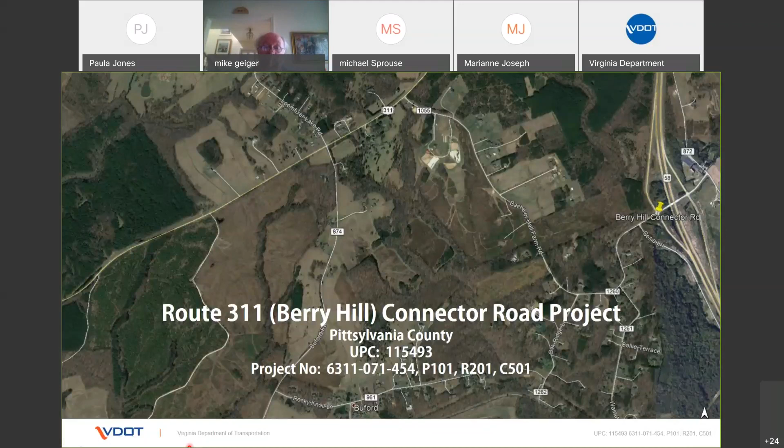Given the unique circumstances of the COVID-19 outbreak, along with our commitment to protecting public health during this national emergency, VDOT is conducting this virtual design public hearing to avoid in-person contact. This presentation will cover the same information that Lynchburg District staff would have shared during the in-person meeting. However, the comment process will be different. Details on how to submit your comments and have your questions answered will be covered later in this presentation. All project information can be found on VDOT's website, www.virginiadot.org.

The virtual design public hearing has been convened by the Virginia Department of Transportation and is being held to receive and consider comments for the Route 311 Berry Hill Connector Road project. You may have attended previous public hearings conducted by VDOT. However, for the benefit of those who have never attended one, I would like to explain why and how VDOT conducts a public hearing. A public hearing has 4 essential purposes.

First, to inform the public of the planning of the project and to present recommendations based on the design to date. Second, to describe the project so that those attending can determine if the project will affect their lives and property. Thirdly, to provide the public an opportunity to see information and express their views at this stage in the planning process when flexibility to respond to comments still exists before design decisions are finalized.

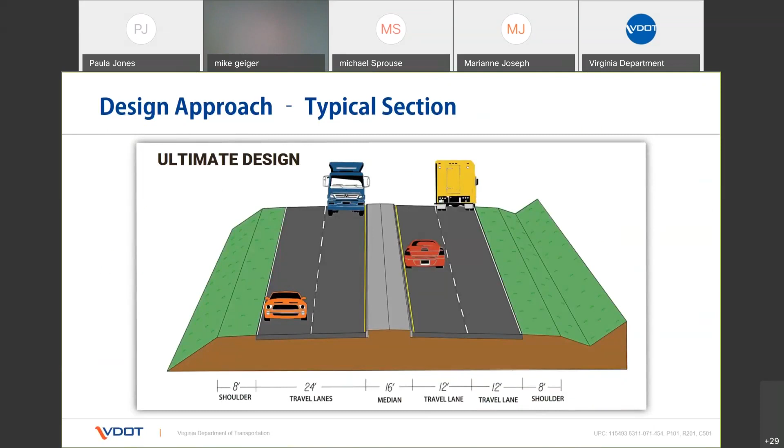The current connector road typical section will build two 12-foot lanes with 8-foot wide shoulders, one in each direction, that will later serve as the eastbound lanes in the future, and will grade for the westbound lanes. This allows for the installation of infrastructure that can be modified in the future that will mitigate future environmental impacts to existing streams and wetlands and surrounding properties.

There are 4 secondary roadways that will be redeveloped to provide a cohesive connection to the new connector road's horizontal and vertical alignment. The typical section for Route 874 Buford Road, Route 1260 Oak Ridge Farm Road, Collie Lane, and Route 1055 Bachelor Hall Farm Road will consist of two 11-foot lanes with 5-foot wide shoulders.

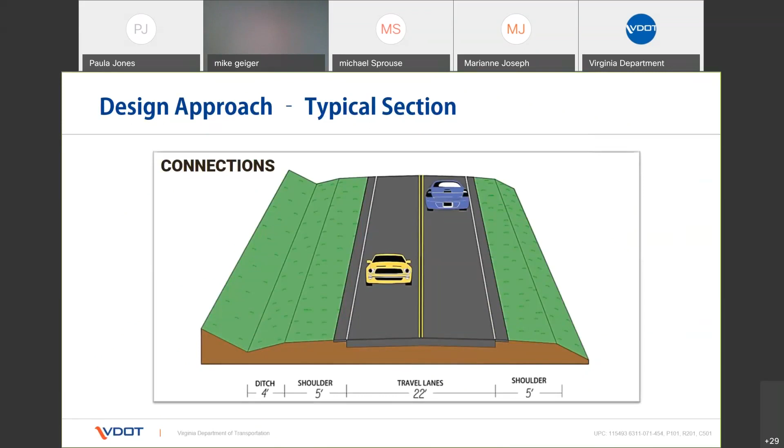The next few slides will represent the plan view of the corridor. After reviewing each plan view, I will zoom in to allow for a closer look. As we review the project, I will highlight significant aspects of the design.

Beginning at the intersection of Route 311, the connector road will tie into the existing two-lane section, and as we travel eastward, the pavement width will begin to widen to accommodate the new Route 311 connection to the connector road. At this intersection, the design will incorporate a right turn lane in the westbound direction to allow for free flow movement onto existing Route 311.

The through movement from Berry Hill will continue to the 58 bypass rather than intersecting with Route 58. Additionally, approximately 1,150 feet of existing Route 311 Berry Hill Road will be abandoned and obliterated.

Continuing eastward towards Route 874 Buford Road, the horizontal and vertical alignment along Buford Road has been designed to improve the overall function of the roadway and to provide sight distance at the new intersection of the proposed connector road.

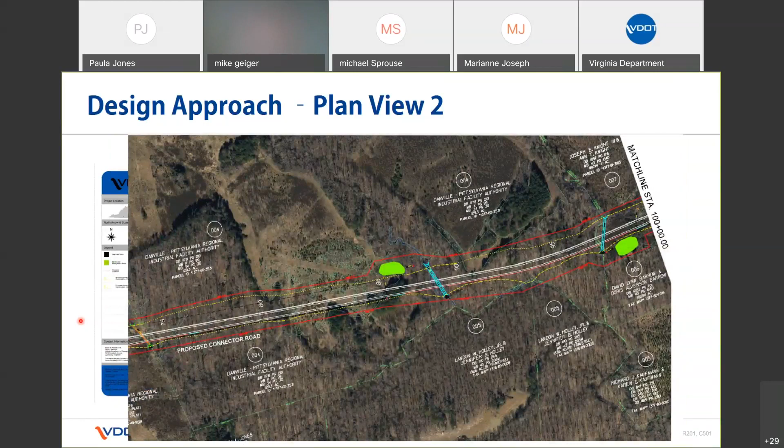Continuing along the corridor, we have the extension of Route 1260 Oak Ridge Farm Road to provide the new ingress and egress to the connector road while closing the existing connection to address the spacing concerns and the close proximity to the existing ramps. A cul-de-sac will be provided to allow residents, school buses, and emergency vehicles an opportunity to successfully turn around within the subdivision.

During the location public hearing held on June 6, 2019 at Brosville Elementary, we received several comments from the residents along Route 1055 Bachelor Hall Farm Road to not connect Bachelor Hall Farm Road to the new connector road. Presently, the main ingress and egress to Bachelor Hall Farm Road is off of existing Route 311.

Therefore, a cul-de-sac has been incorporated at the end of Route 1055 to allow residents, school buses, and emergency vehicles an opportunity to successfully maneuver within the subdivision. As we make the Route 58 connection, as previously stated, the existing Oak Ridge Farm Road access will be obliterated and a cul-de-sac installed. Collie Lane shall tie into the connector road to serve those residents.

Throughout this section of corridor, there are significant fill slopes that will require guardrail. These plans also reflect the proposed right-of-way and utility easements necessary to develop the connector road. During the construction phase, access to private and commercial entrances shall be maintained at all times during the life of the project.

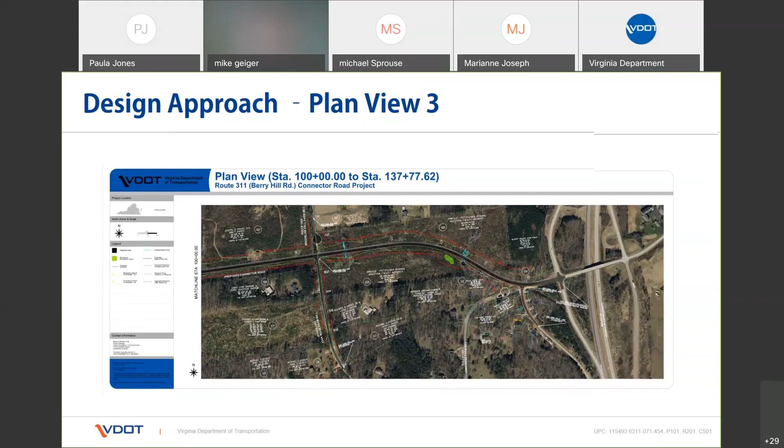Technical documentation for this project addresses the potential environmental impacts identified in the preliminary engineering process. These areas of consideration include archaeological resources, historic resources, wetlands, waters of the U.S., biological resources, hazardous material, and the State Environmental Review Process, also known as SERP. In addition to the other items listed above, the State Environmental Review Process has been completed for the project. The following slides will include a brief summary of the findings.

The William & Mary Center for Archaeological Research conducted an archaeological survey of the environmental project corridor associated with the proposed construction of Berry Hill Connector Road in Pittsylvania County. The investigation was intended to provide specific information concerning the nature and distribution of archaeological resources within the proposed project corridor. The project corridor occupies an area of approximately 109 acres and consists largely of mature and secondary growth forest, farmland, and rural residential properties.

Field work involved systematic pedestrian survey of the project corridor, including both surface examination and shovel testing. Archaeological and architectural surveys are complete. VDOT has determined that all newly discovered sites and archaeological isolated finds are not eligible for the National Register of Historic Places, and that no further work is recommended. The Department of Historic Resources concurred on May 13, 2020.

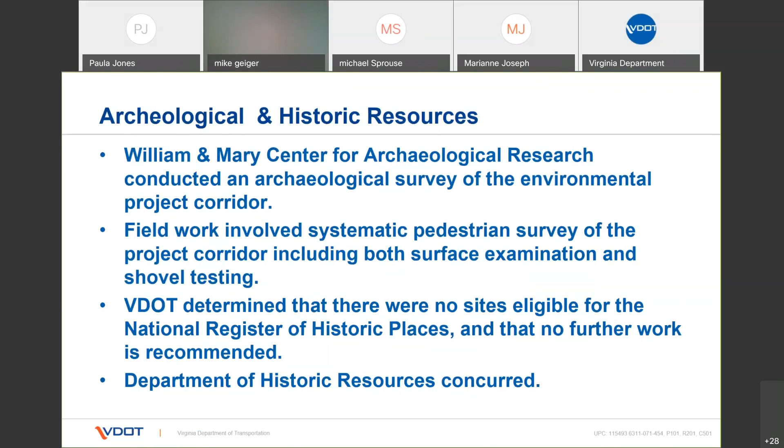The project has 15 stream and wetland crossings impacting Childress Creek, tributaries to Childress Creek, tributaries to the Dan River, and tributaries to McGuff Creek, and associated wetlands. The total permanent stream impacts are 1,915 linear feet and 360 linear feet of total temporary stream impacts. Total permanent wetland impacts are 4 acres, and 0.96 acres of temporary wetland impacts.

Wetland impact compensation includes purchasing 6.92 credits from the Banister Bend Wetland Bank. Stream impact compensation includes purchasing 2,285 stream credits from the Roanoke River Mitigation Bank.

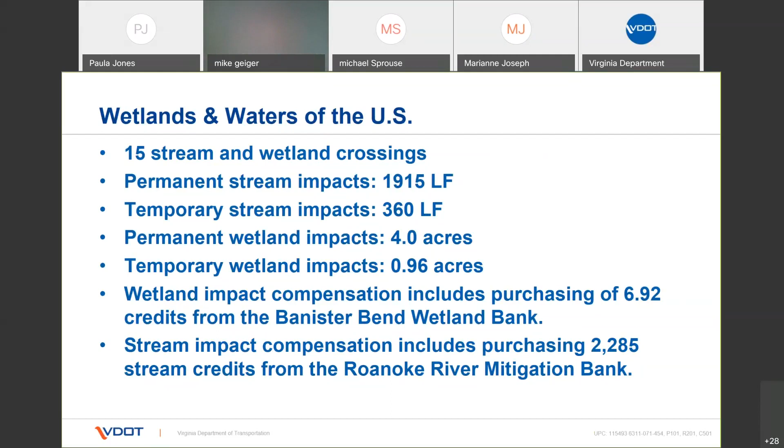The Dan River is listed as threatened and endangered waters for the following species of mussels: James spiny mussel, green floater, and the Atlantic pigtoe. The freshwater mussel site habitat assessment was performed along Childress Creek and its tributaries within the project area. No mussels were seen, live or shells, and no potential mussel habitat was identified. Based on observations made during the assessment, it is unlikely that this project will impact any native freshwater mussels in Childress Creek, its tributaries, or the Dan River downstream from the project. The Department of Wildlife Resources concurred on March 18, 2020.

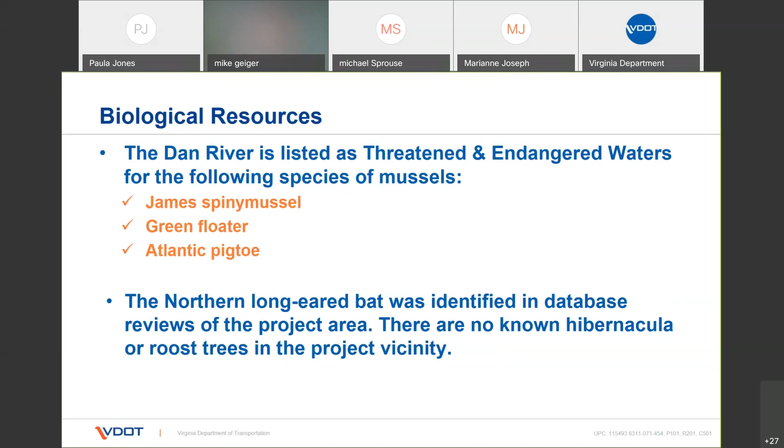The presence of the northern long-eared bat was identified in the project's official species list. Tree removal is required as part of the project and is listed as an activity that may affect the northern long-eared bat. There are no known hibernacula or roost trees in the project vicinity.

In January and February of 2020, a limited Phase 1 environmental site assessment, corridor study, and Phase 2 investigation were conducted respectively. The Phase 1 environmental site assessment corridor study assessed potential recognized environmental conditions within or adjoining the environmental study area that may affect construction methods, design, or cost of the proposed improvements. One location was identified due to the uncertainty of the extent of the partially buried waste seen at the surface, and subsurface exploration activities were recommended. No evidence indicative of buried solid waste or petroleum-impacted soil was present in soil cores collected in the vicinity of the recognized environmental condition.

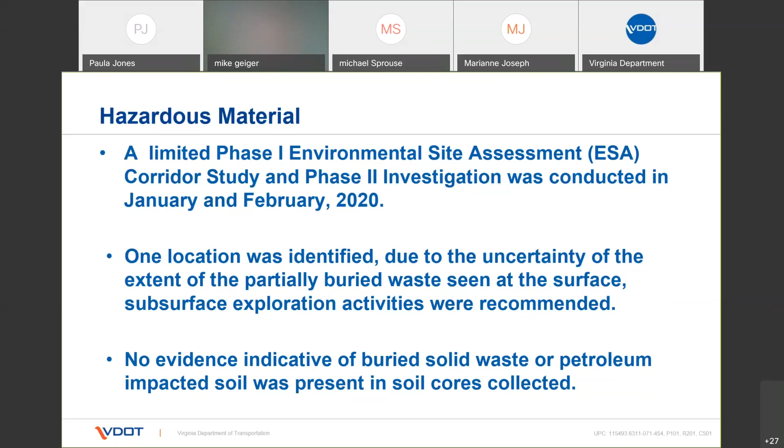Let me provide you now with information regarding right-of-way for this project. There will be approximately 50 acres of proposed right-of-way needed for the Route 311 Berry Hill Connector Road project. The right-of-way will be acquired from numerous properties along the east and west sides of the project corridor. No business, residents, or non-profit organizations will be displaced as a result of this project. All rights of way acquisition will be completed in accordance with the Uniform Relocation Assistance and Real Property Acquisitions Policy Act of 1970, amended in 1987.

The acquisition of necessary rights-of-way for this project will be handled by VDOT. All proposed acquisitions will follow federal and state laws and VDOT policies and procedures. The Uniform Relocation Assistance and Real Property Acquisition Policy Act of 1970, known as the Uniform Act, is the federal law followed for appraisals, negotiations, and relocations of families and businesses.

Each property will undergo a valuation process to determine the fair market value for each acquisition. During negotiations, the landowner will receive a copy of the acquisition valuation, a title examination, a bona fide offer in writing for the acquisition, along with all pertinent construction plan sheets. The VDOT negotiator will communicate with the landowner to ensure all questions, comments, and concerns are addressed.

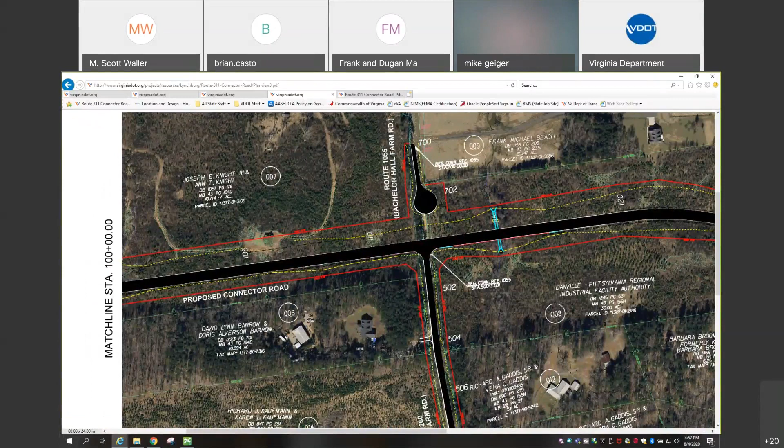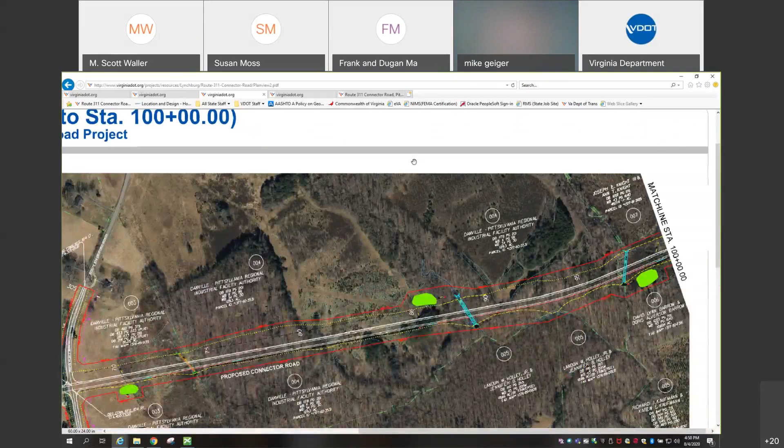Are there any other plans, a typical section, anything else anybody would like to see from the presentation? I'm sorry, the call dropped, I didn't hear if you explained anything about Buford Road. No, you're not breaking up when you speak. Okay, I'll see if I move closer to the computer. So Buford Road, here's Buford Road, can you see it on the screen? Yes, I can. Okay, so someone asked whether there would be a bridge.

There won't be a bridge. It's just going to be a realignment of the road to improve some of the radiuses that exist on the road and to have a smoother transition between the connector road and Buford Road, and to provide appropriate sight distance when we get there because there'll be stop control. So are there stop signs on Buford Road? There will be stop signs on Buford Road, yes.

Okay, so what are you guys going to do about the value of property that you're cutting off? Sorry, you broke up there. You've landlocked everybody on the other side of Buford Road. Buford Road will continue to go through. There will not be an interruption all the way to Rocky Knoll Lane, all the way down. There won't be any interruption in the road there, there'll just be stop signs. That's correct.

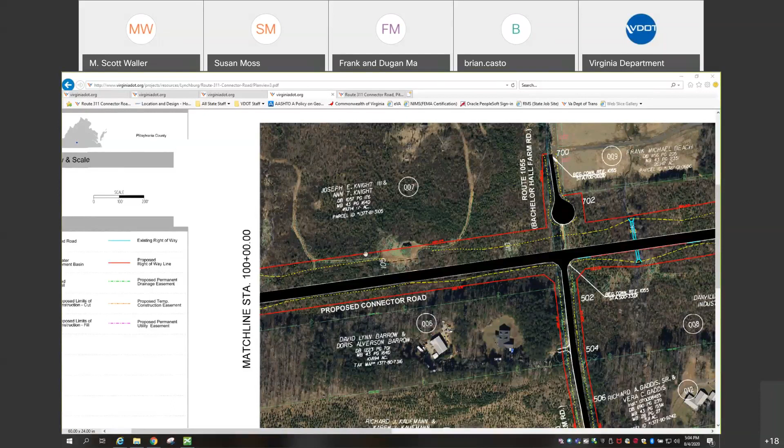One difference would be this project, we had to have the location hearing that was approved by the Commonwealth Transportation Board. That was the first meeting that we had. Then this road will exist. If the 4-laning project ever comes around, that location hearing would not be required. We would just have to hold a separate design public hearing where we gave the public the opportunity to look at the preliminary plans, et cetera.

One other thing, just to reemphasize, is if we do move to where this facility needs to be a 4-lane facility, there should be minimal additional right-of-way required at that time. Most of that would be if we have changes and evolution of design standards, et cetera. The other thing to note is that if we were to go 4 lanes, the interchange itself would also have to be upgraded. We would need an additional bridge or a larger bridge that could hold 4 lanes of traffic. So it would be a more extensive project.

Thank you. You're welcome.

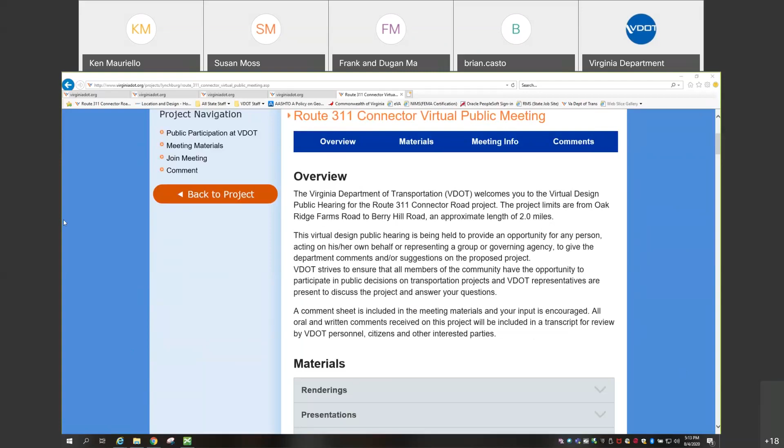Would you happen to have a plan that shows the connector road as it relates to the Berry Hill Road and Buford Road, how that comes through across there? It's like each plan shows a section, but we can't get the full view.

I'm on the website looking at the plans. Can you see it on the screen? So I have it on the screen right now of the plan sheet. Okay, can you see that? Yes, I can see your screen. I have to orient to what you're showing. I'm trying to figure out what we're looking at.

Is that correct? What you said, that's the current bypass going over Berry Hill Road. Is that correct, what I'm looking at?

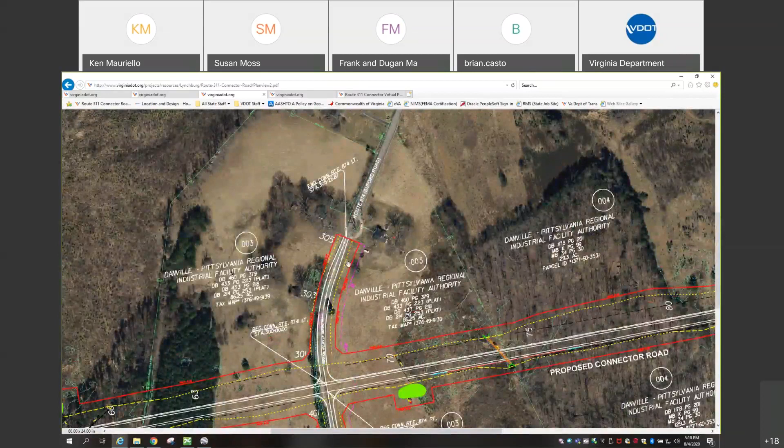Okay, but the road continues. So the top of the screen is Berry Hill. You turn down Buford, and there's no interruption right there where the red line is. And then when you get to the connector road, there's going to be stop signs. Correct, yeah, this just represents, I believe Buford Road is a prescriptive easement.

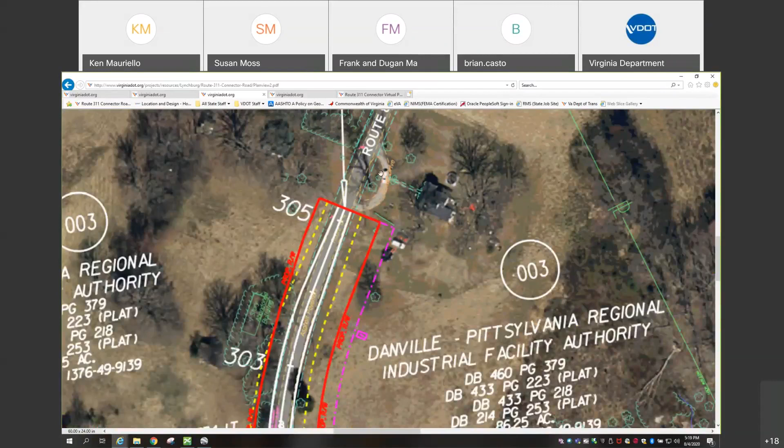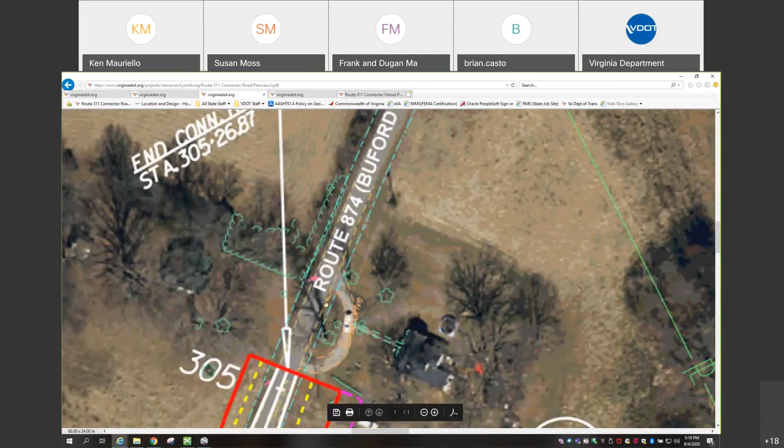So this just represents what our proposed right of way, what we're projecting our proposed right of way to be. Okay, we're with you. So it doesn't mean that the road's stopping here. You can see, so this house will continue, the driveway will still exist and be able to turn onto the road and travel in both directions, just like it normally does today.

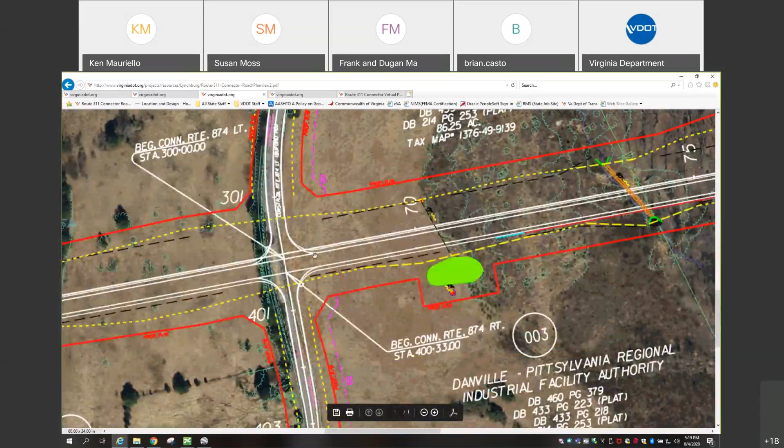Okay, same. And then, the section of Berry Hill that Buford Road connects to now, will any of that section be shut down? So make sure I understand - you're saying the section of Buford Road that connects to Berry Hill up here at the top. Yes. Yeah, that will all stay the same, it will all stay the same.

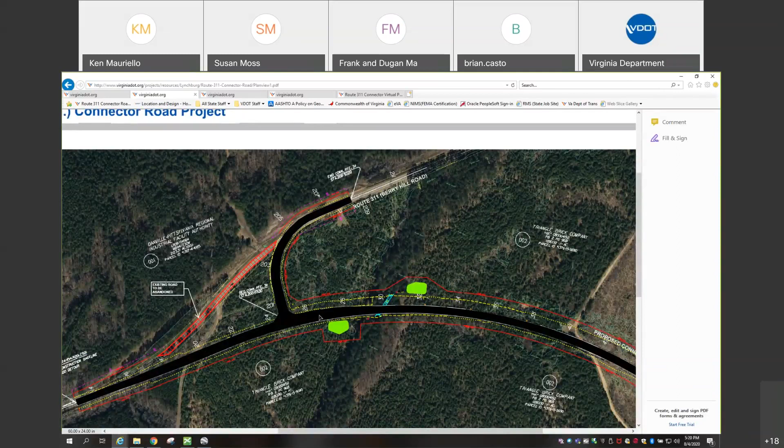So Berry Hill will not be interrupted? Berry Hill will be, so let me go back to, so Berry Hill, what you know as Berry Hill, which is this road here, 311, it just will no longer continue straight this way. It will come and tee in, and at this tee in, then you'll have to make a left or a right. And then,

So then, if you were coming from the mega site direction, if you wanted to get onto existing Berry Hill, they're going to have to come and they'll have to make a left to get onto anything that's on existing Berry Hill. Does that make sense?

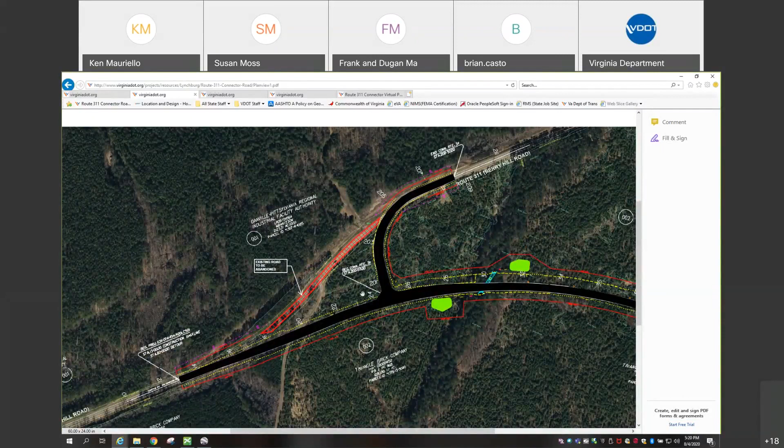And what vicinity of Berry Hill is that? I'm just trying to acclimate to this map. So that, where it tees into the connector, about where is that on Berry Hill? Is there some landmarks? So we know where the bypass goes over Berry Hill, we know where the fire department is on Berry Hill.

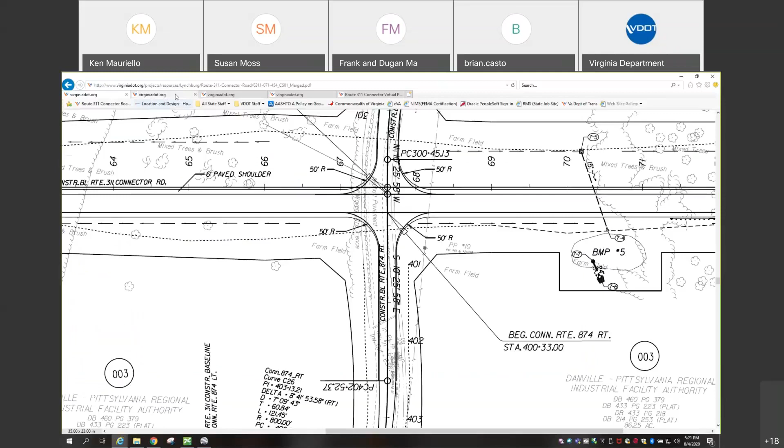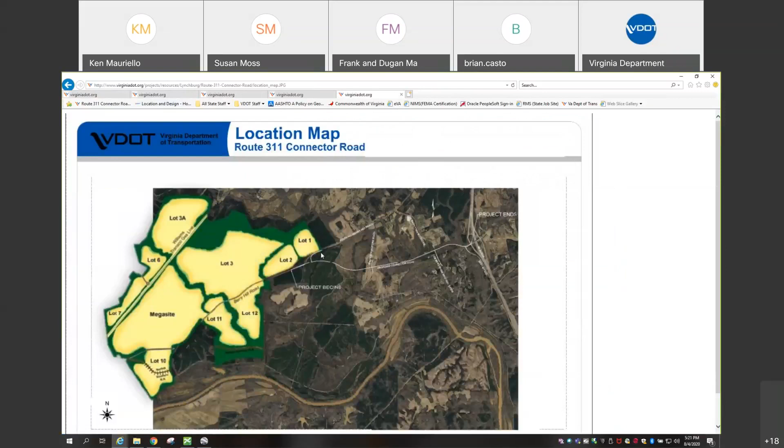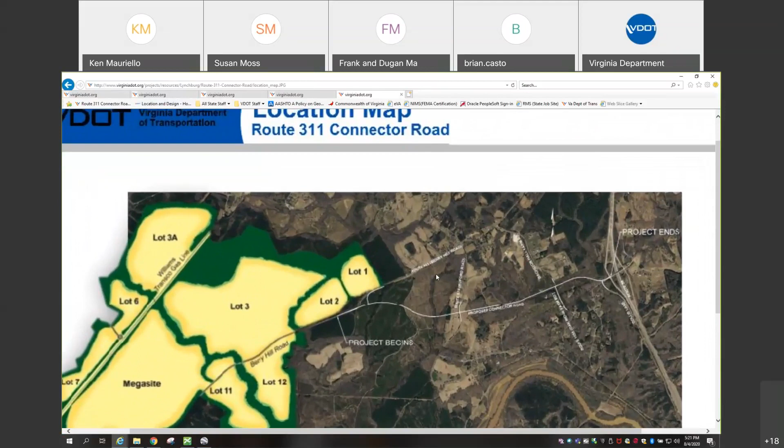So, again, I'm not sure if you're familiar with this. I get a little blurred, but this is the first lot of the mega site.

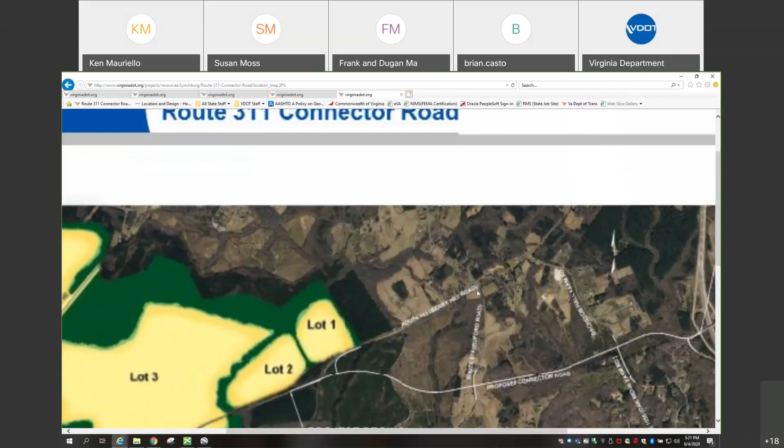You can see here, Beaufort, right in here. Okay, like I said, it's a little blurry. Oh, see, I see it. Mark, it goes right here. Here. Oops, you got it off the screen.

Hopefully you don't get dizzy. So it's coming through here. Here's Beaufort, and it'll tie in and around here. So it'll cross Beaufort and then tee into the connector down Berry Hill Road towards the park. Correct.

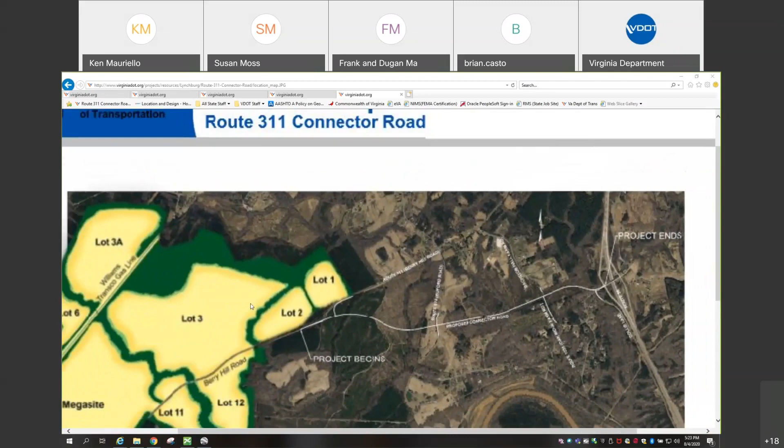Basically, the first lot. Got it. That makes sense, yes it does. So you're crossing over Beaufort, and then this is Industrial Park down here, lot 2, 1, 2, 3, and that one little section right there in front of lot 1, you'll have to turn, yeah, that curve.

And then turn right or left to get on the connector road. Correct. So if you were coming in this direction, like if you lived maybe on this upper end of Beaufort, and you normally go this way to get somewhere, you could still do that. It's just there'll be a little extra turn there. Right, okay, got it.

That was very helpful, thank you for walking us through that. No problem. And like I said, if after this you think of more questions, just email me or call. Most of the information is on the website. We're going to try to keep everything as up to date as possible so everybody is up to date with the information as we have it to share.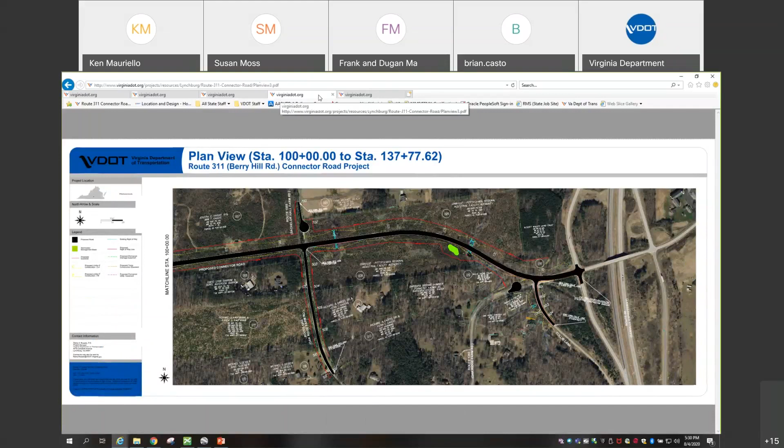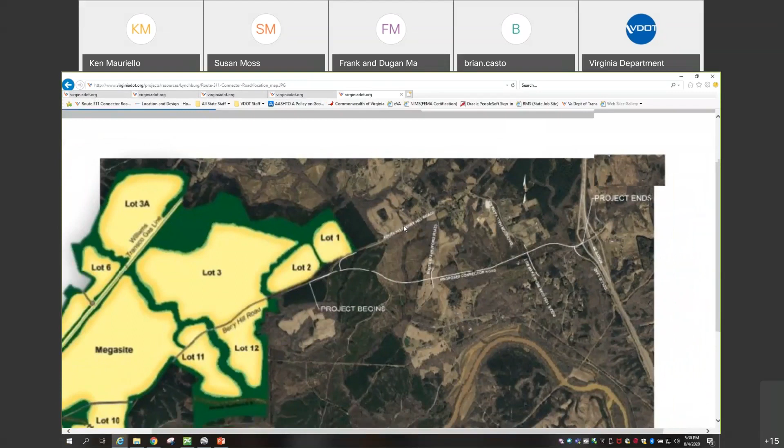Anything else in the presentation anybody'd like to see again, the plan sheet, or anything else? Please just let me know. Again, all of it is on the website, which is www.virginiadot.org. If you search 311, you'll find all the project information, and again, you can zoom in.